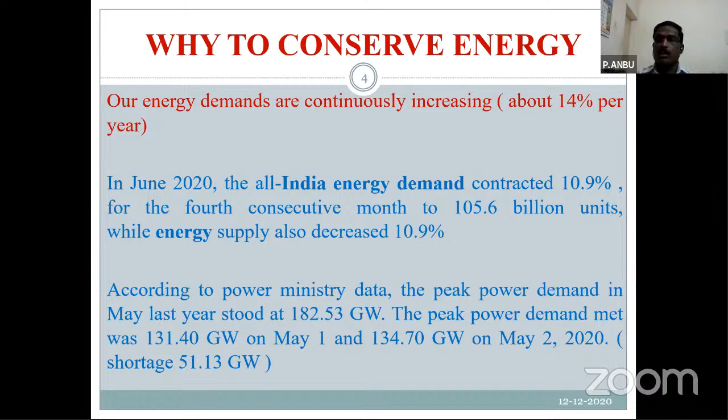So we want to know how to conserve the energy. To make up the gap between power supply and demand, new power plants have to be installed in India, which requires capital and time. To meet growing demand, it has been assessed that additional generation capacity of 1 lakh megawatt has to be added by 2020, requiring an investment of approximately 8 lakh crore.

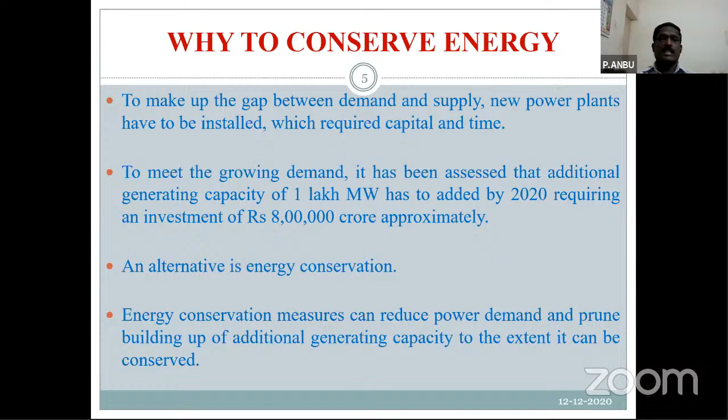An alternative is energy conservation. Energy conservation measures can reduce power demand and the building up of additional generation capacity to the extent it can be conserved. So this is why we have to conserve energy. The other point: we have limited resources of fossil fuels available on Earth, and 60% of resources are consumed so far. So for sustainable growth, we have to save resources for future generations. Energy conservation is also one of the ways to achieve this. Our electricity bill will become less. Okay.

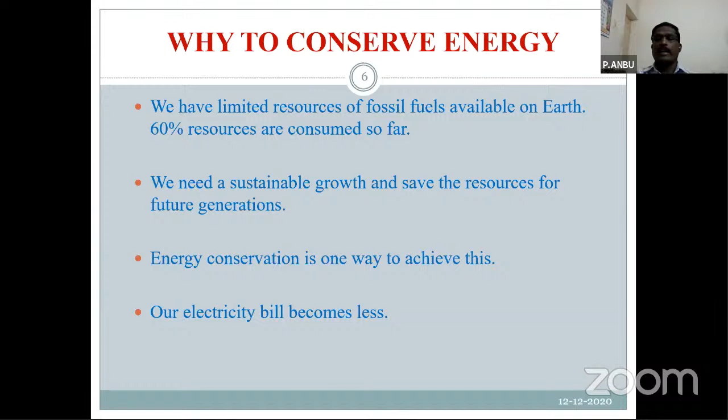The next point: energy conservation is not only a technological issue, it encompasses much broader economic and management issues also. The management issues encompass how to operate, how to switch on or switch off the equipment, and managing it that way. Cost-effective energy conservation measures are well established: 1 unit of energy saved at the consumer avoids nearly 2.5 to 3 times capacity augmentation, due to the plant load factor, plant availability, and auxiliary power consumption.

Thermal power shares about 65% of total electricity in India and also worldwide. Poisonous gases such as carbon monoxide, nitrogen oxides, sulfur oxides, and fly ash are released to the atmosphere, causing environmental pollution. Carbon dioxide is one of the main factors for global warming and climate change, all by operating those plants, apparatus, and devices.

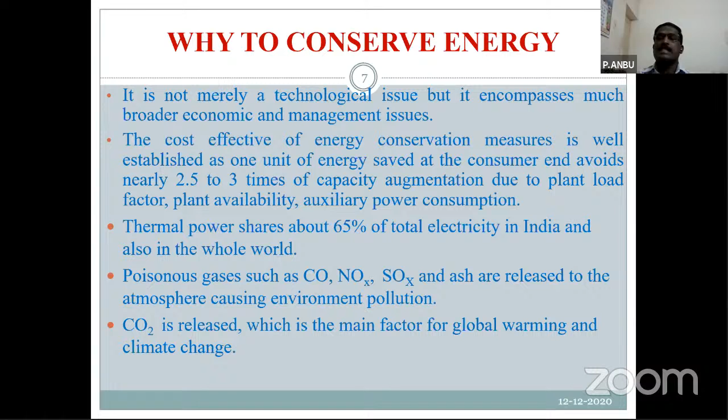What are the types of energy they are using? Renewable energy: it is the energy obtained from sources that are essentially inexhaustible, such as sun and wind. The energy system converts energy found in sunlight, falling water, sea waves, wind, geothermal, or biomass into a form we can use, such as heat or electricity.

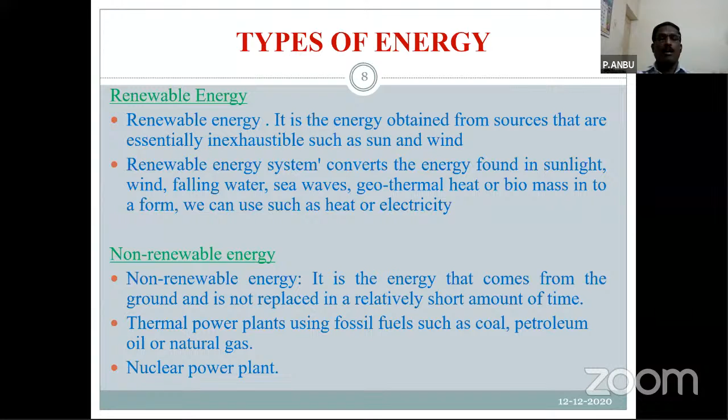Non-renewable energy is energy that comes from the ground and is not replaced in a relatively short amount of time. For example, thermal power plants using fossil fuels such as petroleum, natural gas, coal, oil, etc., and nuclear power plants. What energy are they using? Solar energy, wind energy, hydropower, geothermal, tidal, ocean, and in addition, biomass. These are some of the few energies I listed here.

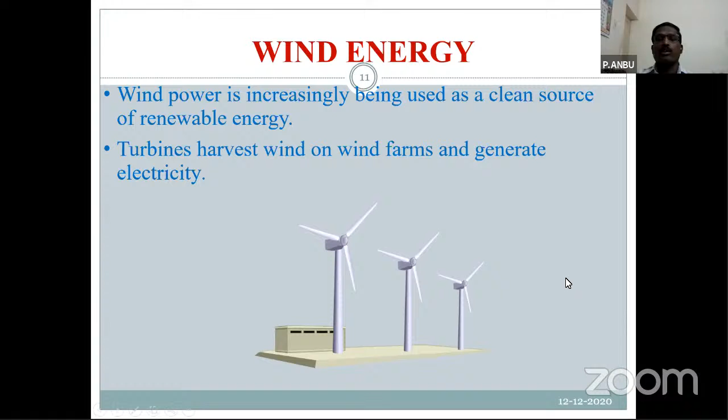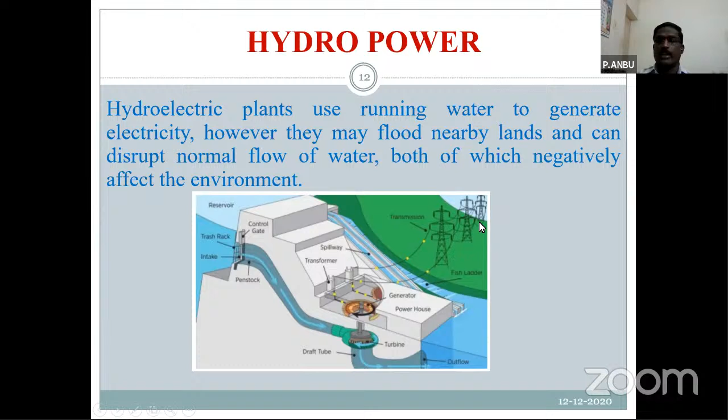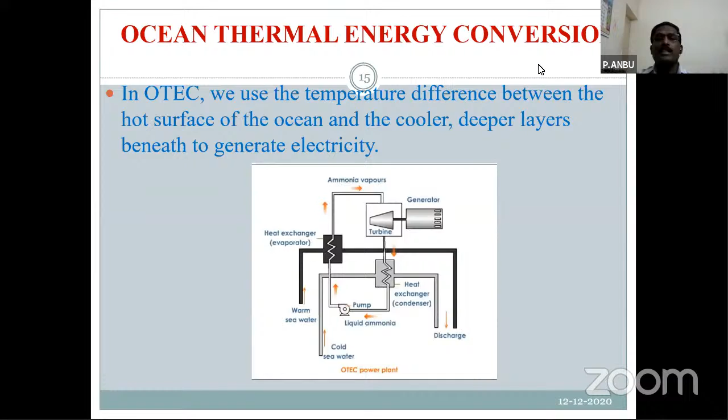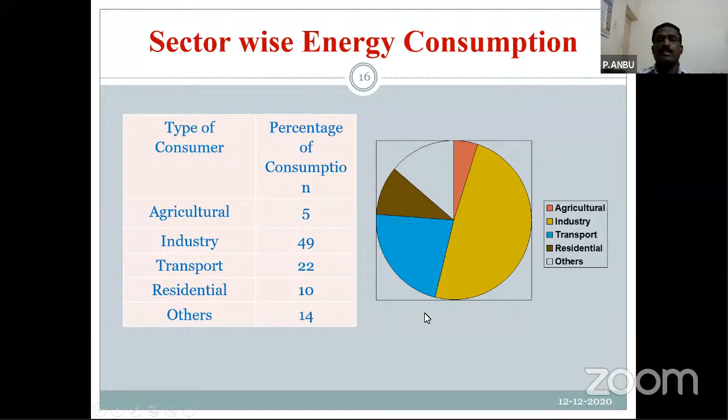So here is how ocean thermal energy is converted, in the figure. Now the slides: what is energy, what is energy conservation, why we are conserving energy, and the sources of energy. Now sector-wise in India, the data are just giving the guidelines for energy consumption percentage. Agricultural side 5%, industry side 49%, transportation 22%, residential side 10%, others 14%. So this is energy consumption sector-wise.

So this is energy consumption. So the possibility of saving: the economy as a whole up to 23%. On the agricultural side we can save up to 30%. Industrial side 25%. Transportation side, domestic side. So in all these sectors, for agriculture in villages, many of them are just switching on, and within that time they are not switching off.

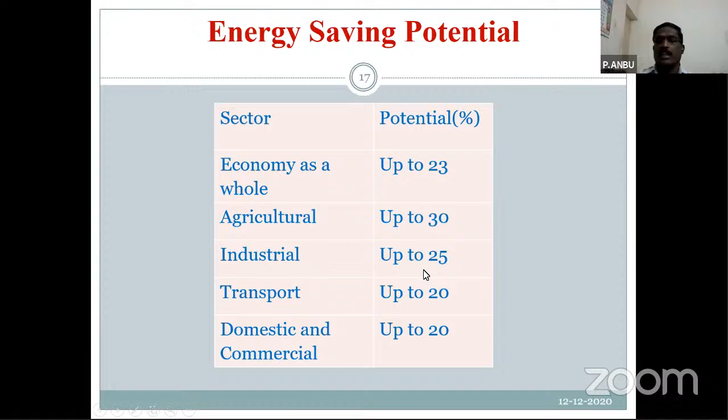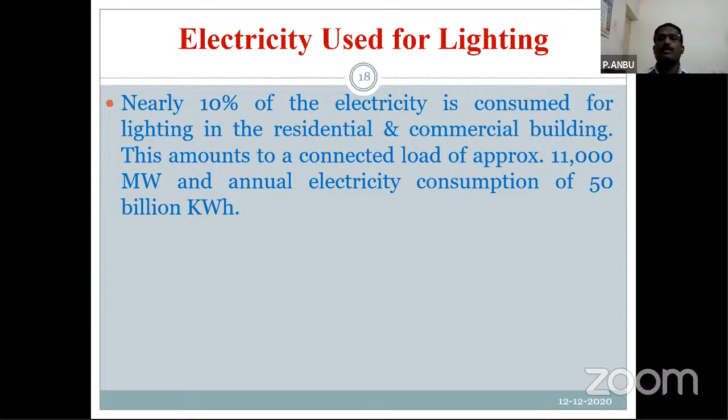Industrial side, like induction motors or whatever device or instrument we are going to use, switch on or switch off, the operational time, voltage fluctuation, or how we are going to operate. Based on that, we can save. The electricity used for lighting: nearly 10% of electricity is consumed for lighting in commercial buildings and the domestic side. This amounts to approximately 11,000 megawatts, with annual electricity consumption of nearly 50 billion kilowatt hours. So this we can save on the lighting side.

Saving on the lighting side: how we are going to save on the operational side. Make maximum use of natural light. Switch off when not required. Modify the lighting layout to meet the need or demand. Select light colors for interiors. Provide time switches or PV controls, photo sensors. Use a lighting transformer to operate at reduced voltage, or install energy efficient lamps, luminaires and controls. Clean translucent sheets and luminaires. These are the ways we can save energy, so we can save money.

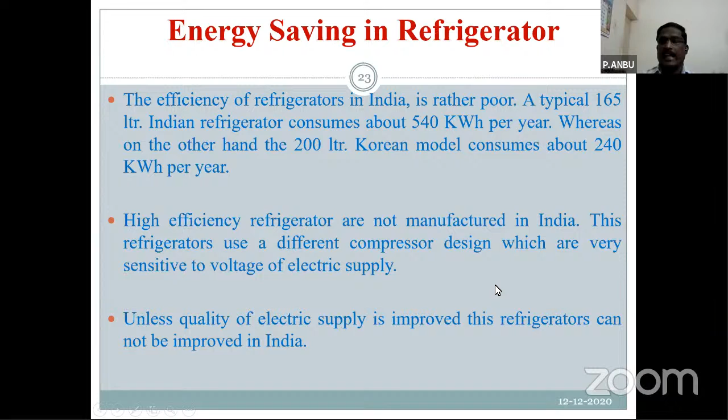So high efficiency refrigerators have to be manufactured in India. So the designs of the refrigerators have to be improved and we have to manufacture them. But unless the quality of electric supply is improved, refrigerators cannot be improved in India effectively for saving energy.

Energy conservation in industries. So some of them, the motors, even boilers, etc. are also there. Some of the devices I added here. Energy saving in different industrial equipment: the motor side, air compressor side, pumps, cooling towers, the lighting side. How they are going to be operated.

So saving on the motor side. Most of the motors in industry, nearly 90 to 95%, are induction motors. Induction motors consume nearly 70% of total electrical energy generated. The capacity of the motor is proportional to torque and proportional to V square.

The various causes of energy loss in induction motors are due to the following factors: oversized motors, rewound motors, improper voltage, less efficient motor driven equipment, idle run. So these are the reasons for energy loss on the induction motor side.

So sizing of motors plays a vital role in energy efficiency. It's very difficult to choose the right size of motor in a single step in applications. So step by step, in 2-3 stages, we have to choose the proper size for saving energy. The major reasons for oversizing motors may be starting torque requirements, excess caution and safety factors, ad hoc decisions. So these are the reasons.

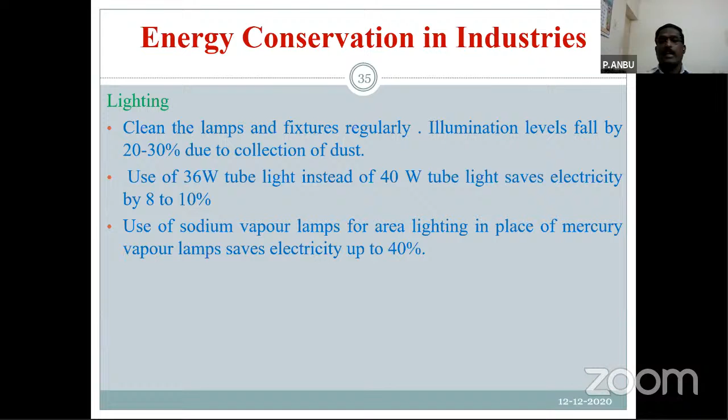Similarly, on the lighting side: clean the lamps and fixtures regularly. Illumination levels fall by 20 to 30% due to collection of dust. Use of a 36-watt tube light instead of a 40-watt tube light saves electricity up to 8 to 10%. Use sodium vapor lamps for area lighting in place of mercury, so we can save electricity up to 40%. So these are the ways, by choosing or operating the apparatus, we are able to save energy, and the percentage.

The next, energy audit. The Bureau of Energy Efficiency in India was formed in 2001-2002. Auditors from the Bureau of Energy Efficiency come, and the energy auditors inspect, analyze, and evaluate the energy consumption. They assess how much energy the industry uses and pinpoint opportunities for saving energy. Accurate measurement of energy consumed is necessary for an energy audit to arrive at energy conservation measures.

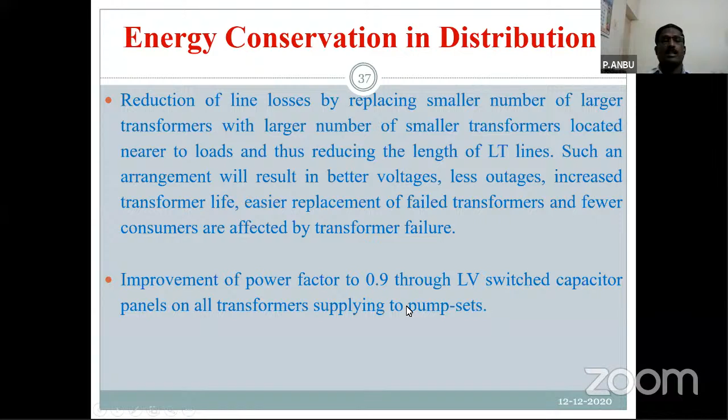Next, the reduction of line losses: replacing a smaller number of larger transformers with a large number of smaller transformers located near the load, reducing the length of low tension lines. Such an arrangement will result in better voltages, increased transformer life, easier replacement, fewer outages of failed transformers, and fewer consumers affected by transformer failure. Improve the power factor to 0.9 through LV switched capacitor panels on all transformers supplying pump sets.

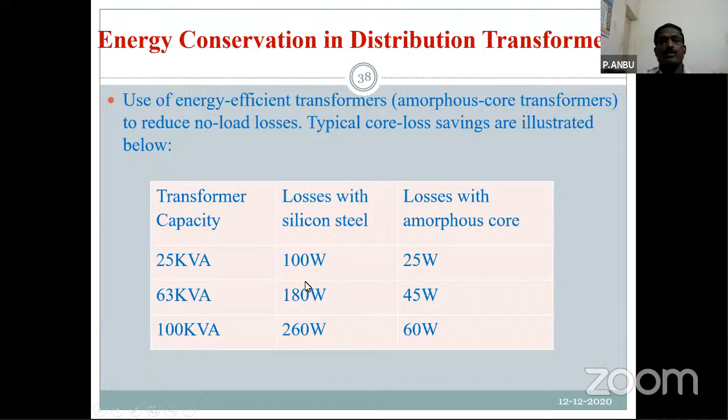Energy conservation on the distribution side: the use of energy efficient transformers, amorphous core transformers, to reduce no load losses. Amorphous core transformers are recently used commercially, unlike silicon steel strip. A 0.35 millimeter or 0.27 millimeter thick plate is used in the core of a conventional transformer, while 27 micrometer is used in an amorphous core transformer. So compared with silicon steel, the loss will be less.

Every day, we can work at conserving energy. So what is energy? What is energy conservation? Why do we go for conservation? The sources of energy use in industries are the lighting system, the motor system, air compressors, etc., and by operating them properly we are going to save energy. So how in our daily life are we going to conserve energy?

Insulating, turning off lights, and using appliances like dishwashers when they are full are just some of the ways people can limit energy use in their homes. Turn off electronic devices that are not in use. Not only turn them off, but try to remember to unplug them. You'll be surprised how much energy will be saved in one simple step. Also carpooling, bicycling, taking public transportation are effective energy saving ideas.

Energy conservation in India, the Energy Conservation Act. Energy per unit gross domestic product is much higher in India, 3.7 times Japan and 1.5 times the USA. We are among the world leaders in high wastage of energy, with power shortage and uncompetitive product pricing hindering international trading. There is a potential of 25,000 megawatts of energy saving. Energy conservation can reduce peak and average demand. One unit saved avoids 2.5 to 3 times capacity addition.

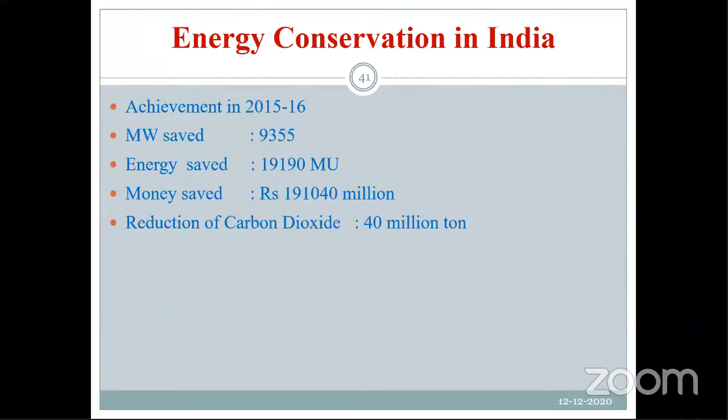Sir, can I answer that question? Yes. Actually, the original design was to continuously run the compressor throughout the period of cooling, and it would be switched off when the temperature reaches the desired level. Now they have changed it to something like a variable frequency drive in the compressor also. Only the required amount of refrigerant will flow through the compressor, so the machine will work only to the need.

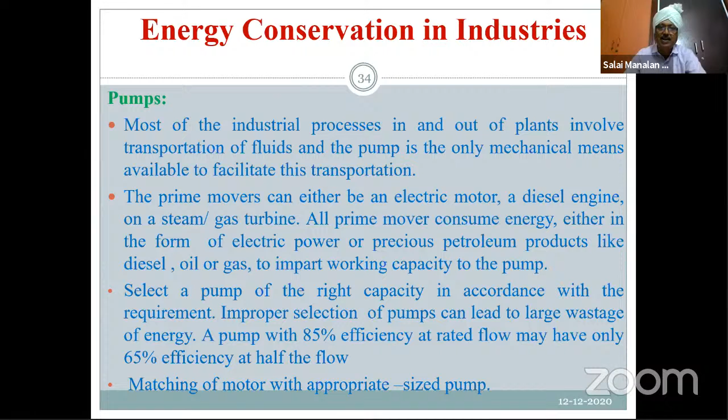And there is inverter technology introduced into refrigerators also nowadays. So it also gives us better energy saving, and we are practically able to see that with 5-star and 4-star rating refrigerators, more than 50% energy savings is really achieved in our household application. We have practiced and tested it also. Okay.

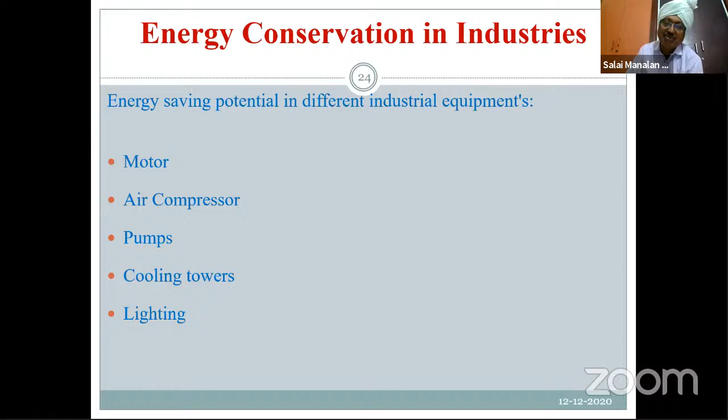One more thing. Is VFD possible in AC also? Yeah, it is there. It is called inverter power, and the compressors have variable refrigerant flow through the compressor based on the temperature requirement. It is coming in AC also, sir.

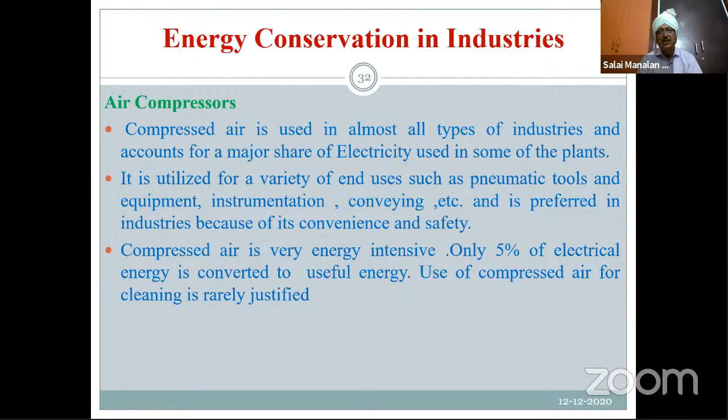Inverter is coming, that you have to ask for, and you should go for a higher star rating. It will be a little costlier, but you will be offsetting it with the savings in a very short period. Maybe in 1 or 2 years itself, a 5-star rated fridge or AC will give you back the extra amount you invest in purchasing it. And similarly, LED lights are also going to be very useful in the power saving aspect.

Yes, sir. Thank you for your reply. I would like to know whether these Korean refrigerators are available at present in India. Dr. Anbu to answer. We'll explore it. Actually, certain brands like LG are from Korean technology, I think. We'll explore it; we will refer to Google. Thank you.

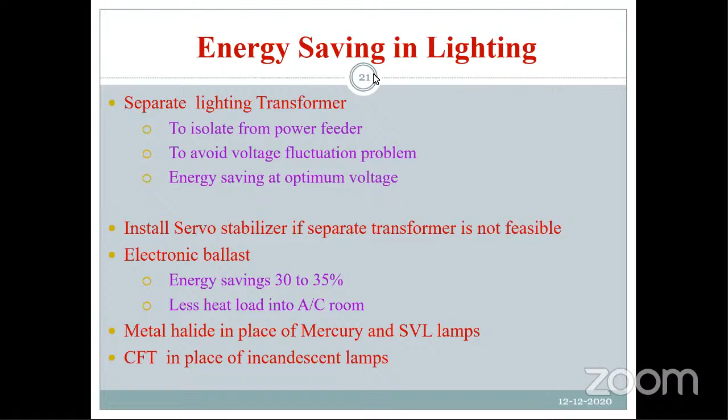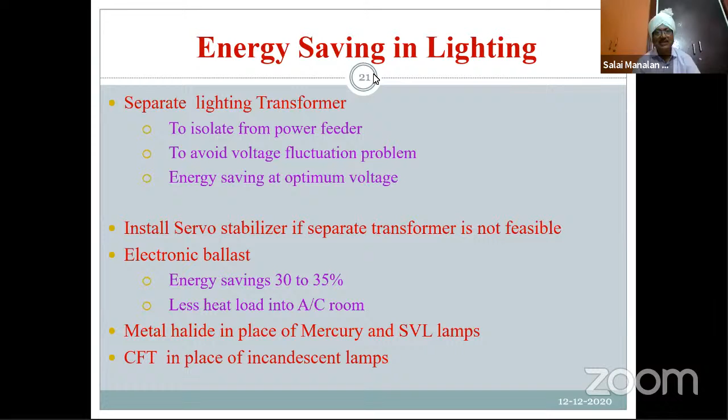Salai, you can ask him how many students from VIT can visit. The people who are really interested, 3 or 5 people, can join with us on the day we make the visit. Okay, sir. That means the project students who are working in that area. Definitely. Okay, sir.